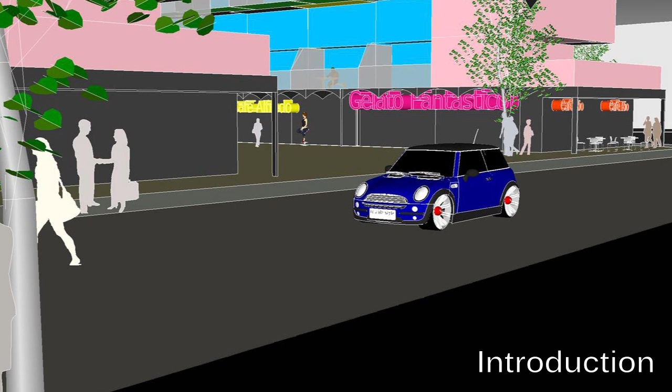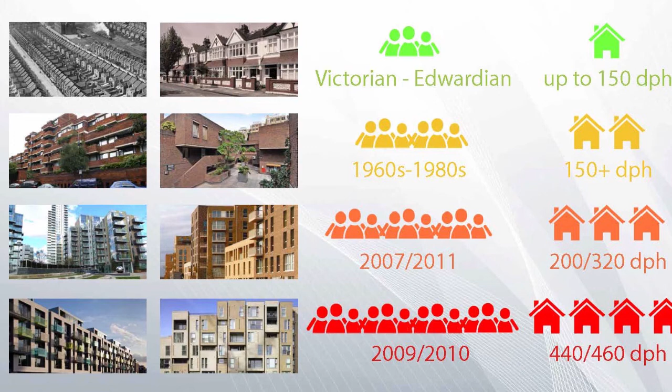The main focus of this project is to create high-quality development in the central area of London that can house 500 people per hectare. This project is a development of the Issues 1 Group project, which explores the consequences of intensified land use in two concepts: medium density of 200 people per hectare and high density of 500 people per hectare.

It also analyzed the benefits of superdensities, such as the possibility of providing rich social infrastructure, quality public transport links, and highly accessible public open spaces.

The group's two concept models were designed to deliver four key characteristics required to create a high-quality environment: functionality, sociable and sustainable, health and comfort, and identity.

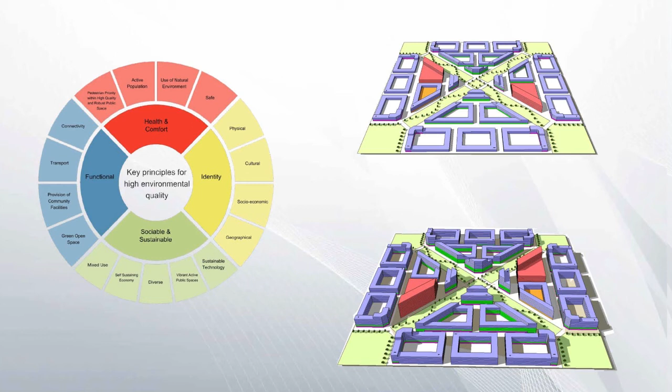As a consequence of providing land-hungry uses at high density, both concept models only offered flatted development as a solution. However, some believe that flatted development can be attractive to families that would otherwise prefer to live in a house, as long as it provides certain design solutions that make living in a flat similar to living in a house.

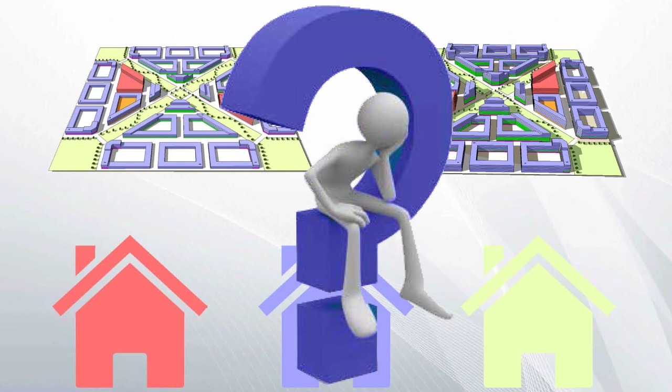This level of detail wasn't explored by the Issues 1 project, and therefore has been the main focus of the Issues 2 project. The Issues 2 project focuses on design of private outdoor space in a variety of forms, such as patios, roof gardens, and balconies.

Each space will have three qualities: privacy, natural light, and usability, that will make the space attractive and more usable. The previous Issues 2 report explored these qualities and offered design solutions which are now being implemented and tested in this final design-based project.

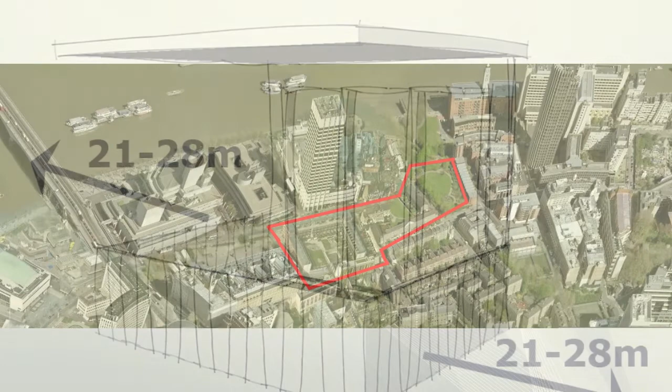The development site is approximately 1.85 hectares and lies within the South Bank area of London. The site lies in a sustainable location. It has good access to public transport hubs, providing local and international connections. Bus stops, tube and railway stations are also within walking distance.

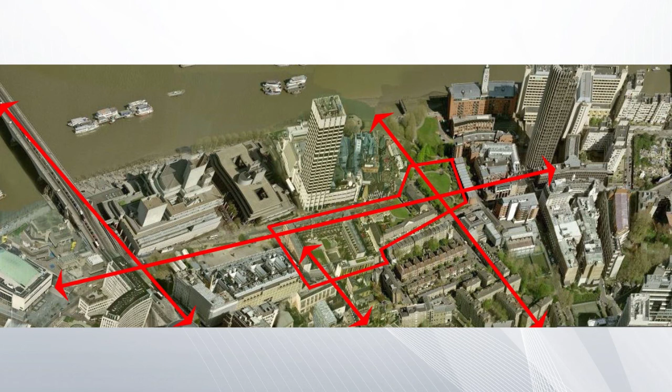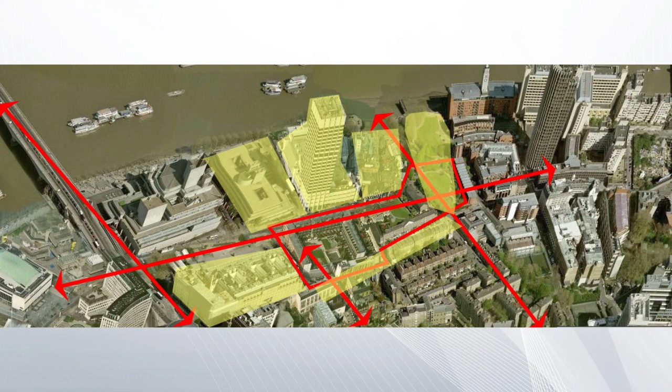Furthermore, there are cultural and leisure facilities close to the site, for example at Gabriel's Wharf to the north. The adjacent land uses include King's College London, IBM, London Television Centre, Gabriel's Wharf, Bernie Spain Gardens, and housing located opposite Stamford Street. Near to the site are the Oxo Tower and South Bank Tower.

The River Thames is to the north. The surrounding area is 3 stories and more in height. Coin Street is known for its characteristic microclimate and northeast winds. The area is generally flat. The development site is developed and is mainly in residential use, predominantly comprising flats.

The area has good legibility, being developed on a grid pattern, but suffers from lack of surveillance and inactive frontages. The site offers the opportunity to take advantage of nearby views, create active frontages, and enliven and connect the area with its surroundings by drawing people to the site.

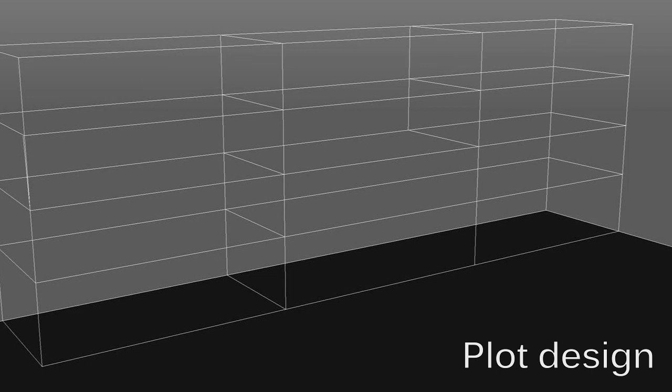Each plot has been designed within a modular template of the same floor space and height. This solution allows for mixing different flat types within a block and avoids the concentration of similar house types.

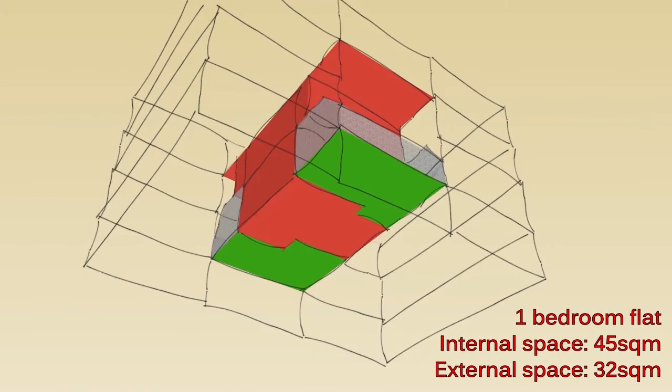In addition, building plots on a module allows for the individual private outdoor space to be fully enclosed and integrated within the living room area to facilitate flexible use of space. All flat types meet the nationally prescribed internal floor space standards.

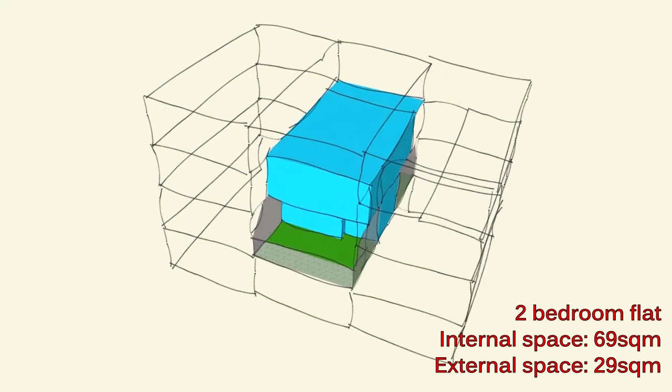As shown, the site consists of 9 plot types, including single-story studio apartments, 2-story flats, and 3-story houses. In accordance with the project brief, all plot types benefit from a private outdoor space which receives at least 3 hours of direct sunlight a day and can facilitate activities normally undertaken in a garden.

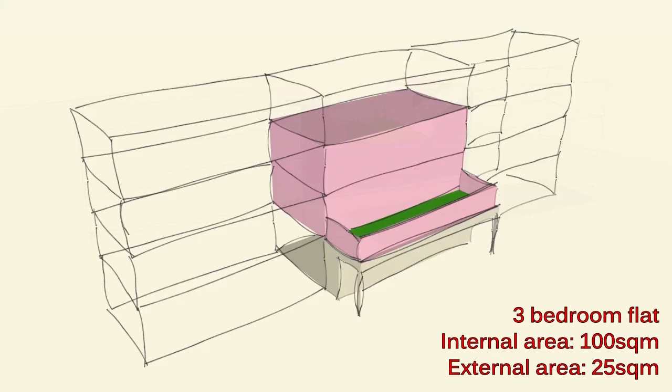As a standard, the areas that access the outdoor space accommodate living rooms and kitchens, and the areas below or above accommodate bedrooms. Houses also benefit from a work office space in a ground floor front room and a utility room at the rear. This solution deals with the lack of natural light within the ground floor area and activates the frontage.

Three-story terrace houses are located within the western parts of the site to complement the height of the existing housing to the south and the college building to the west.

To maintain privacy, each house has been designed to have at least 11 meters long garden so that the separation distance between rear windows meets the standard of 22 meters. In addition, a row of trees have been planted between the rear gardens to further screen direct views of houses.

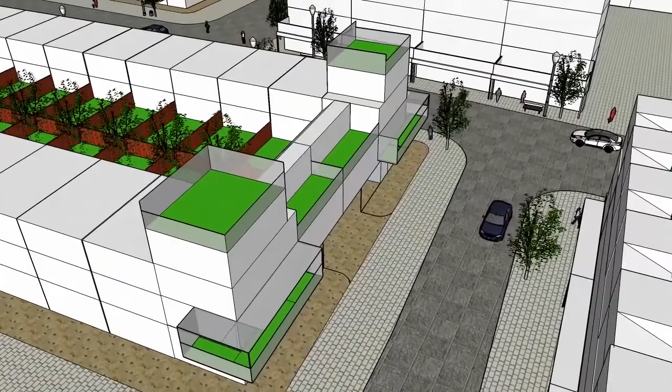At each end of the terrace are one-bedroom flats and studios with roof gardens and balconies overlooking the site and improving its surveillance.

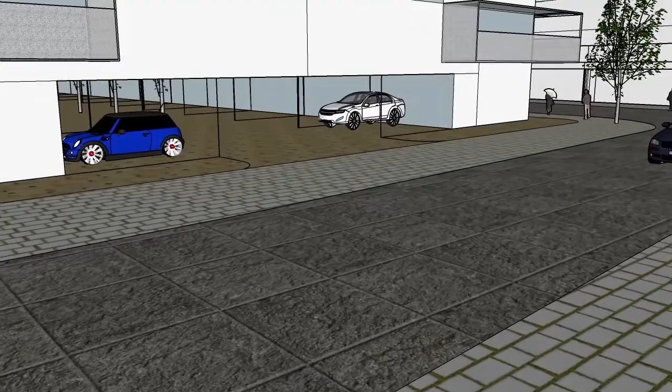Each house has 2 car parking spaces under the garden, which are accessible from the main street on both sides of the block.

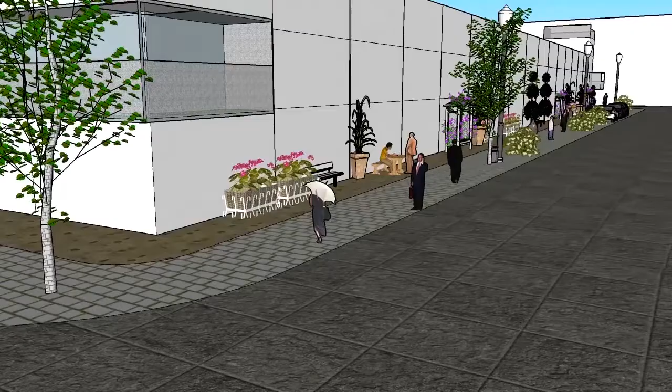The immediate area around the block has been designed as a semi-private hybrid zone that, although open, is owned and maintained by the residents, for example by keeping plants and creating sitting areas. This design facilitates social interaction, community spirit, and neighborly relations.

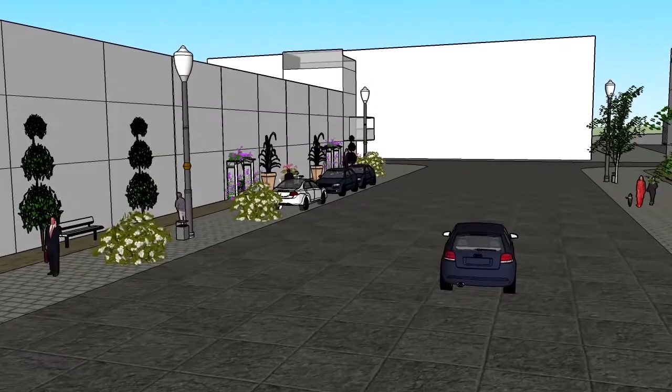In addition to this area, the public pavement is 4.5 meters wide and can accommodate car parking spaces, which are broken up by grouped street furniture and planting to soften its appearance.

There is a potential to extend the roof space of each house to create further bedrooms if necessary.

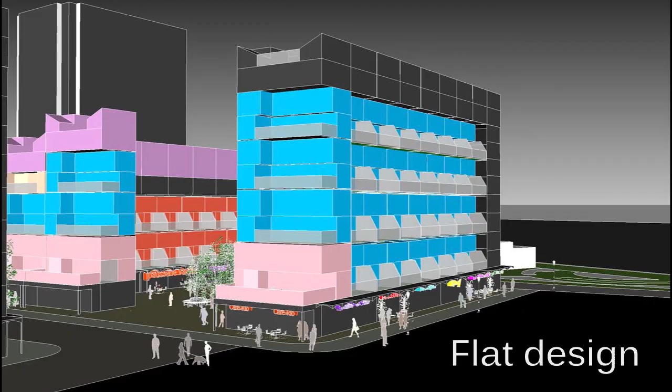Flats are located within the eastern parts of the site, with story heights increasing to the northeast. This solution creates a barrier to the prevailing winds, reducing the need for energy and improving surveillance of the open spaces to the east.

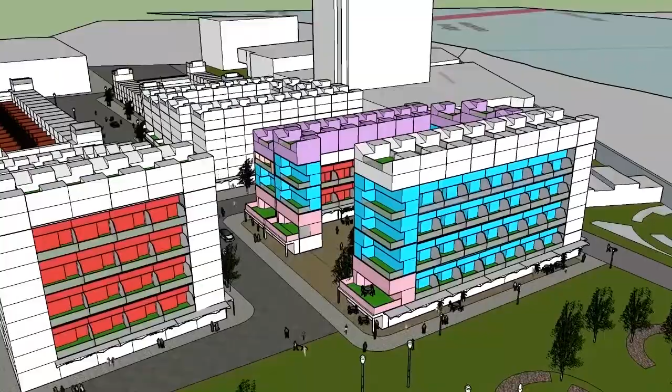The northeastern block has been used to test design principles due to its smallest and therefore most restrictive design. Despite this, the block incorporates all the flat designs shown in the previous section.

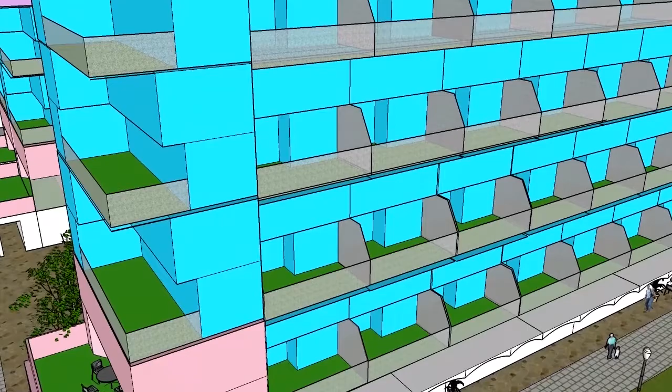The block also accommodates commercial units on the ground floor.

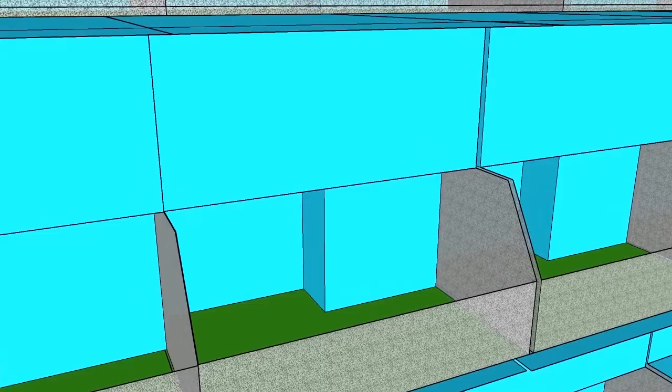Located to the east are double-aspect 2-bedroom flats. The double-aspect design has been developed to ensure that east and west-facing flats can offer sunlight throughout the day. The east-facing space benefits from sunlight in the morning and offers views towards the park.

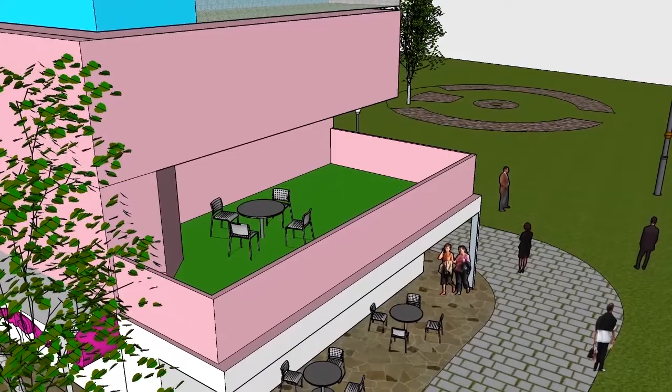Further flats incorporated within this block are single-aspect 2-bedroom flats and 3-bedroom flats with outdoor space located above the commercial units. As these flats are south-facing, they receive more than 3 hours of direct sunlight during the day.

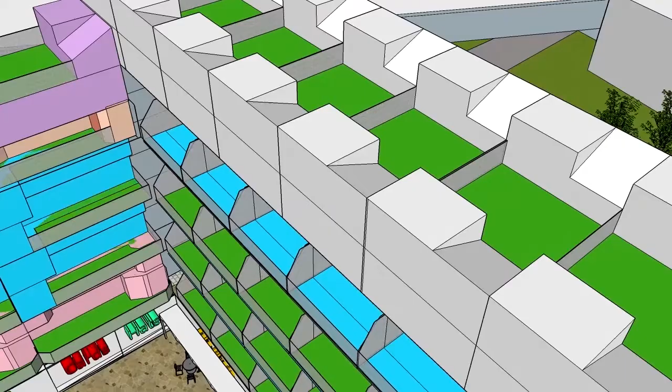Here we can see the other aspect of the 2-bedroom flats facing west, overlooking the internal courtyard area and benefiting from afternoon light. 3 and 4-bedroom flats are located on top of the block with roof gardens overlooking the park and internal courtyard and offering views of the River Thames.

The south-facing wing accommodates single-aspect studio apartments and 2- and 3-story flats with balconies overlooking the internal courtyard.

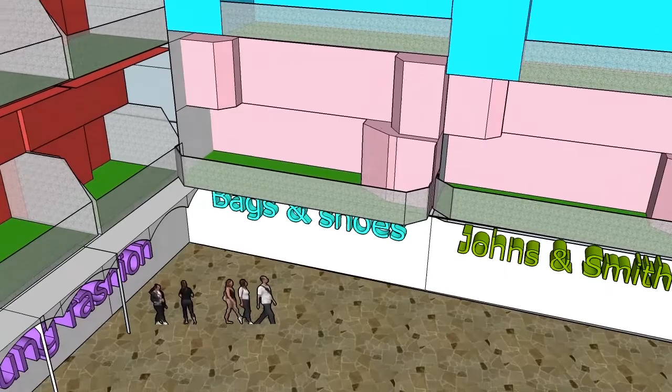The eastern wing accommodates double-aspect 1-bedroom flats and further 3- and 4-bedroom flats with roof gardens. The fronts of the south-facing flats overlook the main street within the site, improving safety and sense of security.

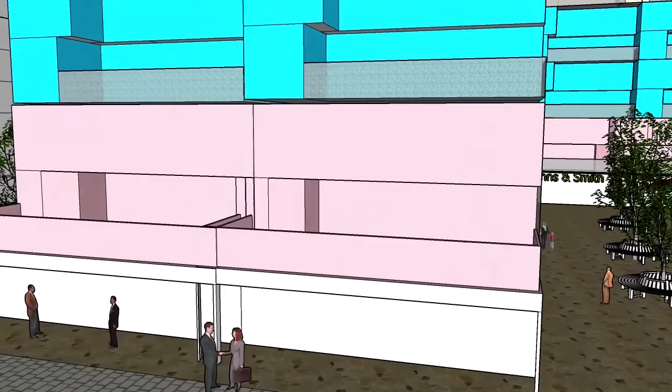To maintain privacy, the separation distance between the outdoor spaces facing each other is 30 meters. In accordance with the project brief, each of the outdoor private areas are usable, meaning that they can accommodate tables, chairs and plants and areas for children's play.

The outdoor spaces within this block and others, together with the local parks and open spaces, create a green corridor for wildlife and biodiversity, which also reduces the risk of flooding.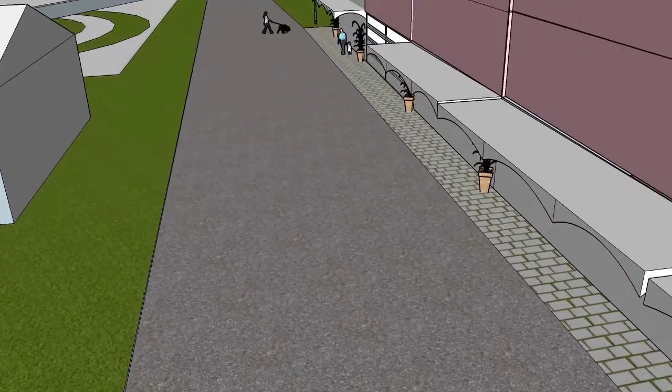In addition to on-street car parking spaces, there is undercroft car parking accessed from the main road via secured entrance. Each of the flats within this block has 1 allocated car parking space.

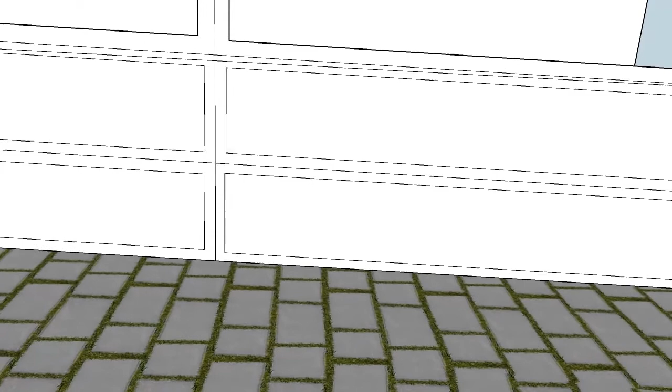The area within the block has been designed as a marketplace based on the Rotterdam Market building. During the day, the shops and cafes can be accessed both from outside and inside the block.

In the evening, only front accesses are available. This area encourages interaction with visitors and neighbors, contributing towards social inclusion and community strength.

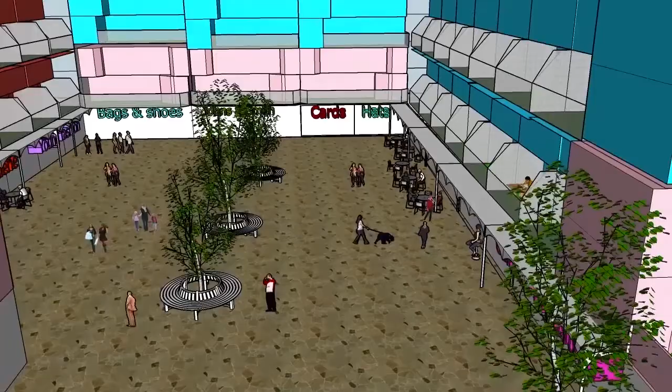The top of the block is screened, with a glazed roof to allow the use of the internal area during unpleasant weather conditions and allows sunlight to enter the courtyard and the private outdoor spaces.

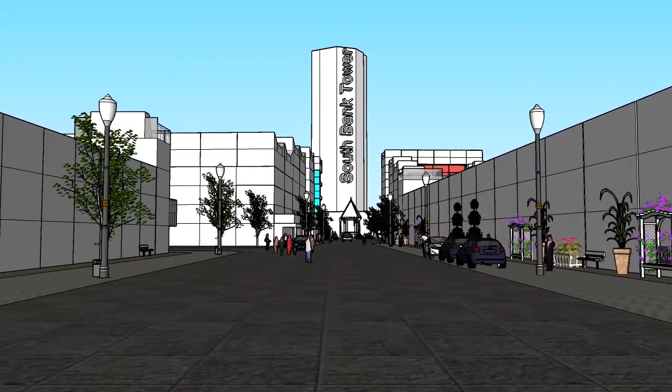The site has been designed on a grid pattern with a main route running west-east throughout the site towards the South Bank Tower located just outside of the site. This simple design ensures legibility and permeability of the site.

Areas immediately adjacent to the houses are designed as hybrid zones and can be used as front patios. They enhance the identity and distinctiveness of the area.

A variety of trees and planting is used throughout the site to soften the urban landscape, add seasonal interest, and boost sensory richness. The benefits of having trees include mitigating climate change, absorbing air pollutants, and improving air quality of the site.

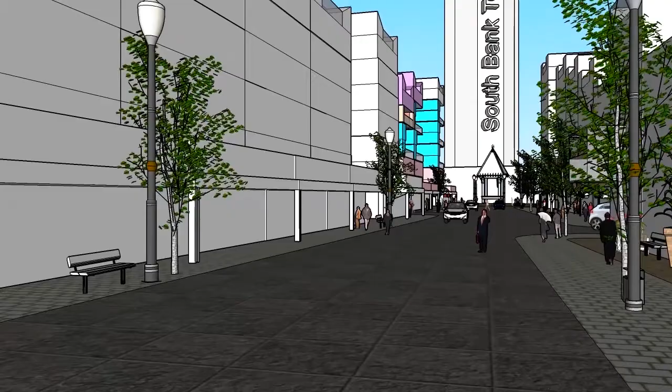All public areas are well overlooked, with the highest stories facing the public open space. Legibility of the site is maintained by the use of vistas, urban features, and street furniture. The existing towers located nearby add to the urban drama of the site.

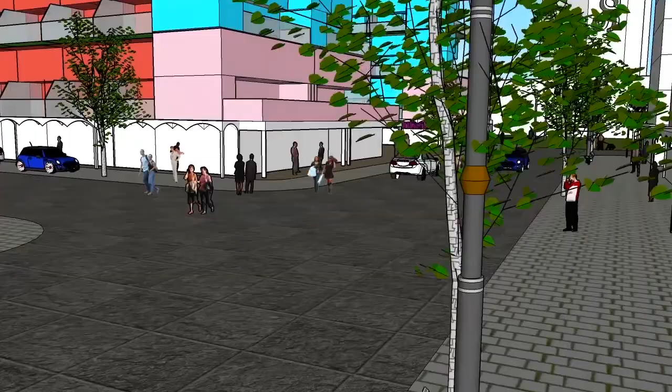The streets have been designed to act as public spaces and form shared urban spaces where pedestrians have priority. Car access from the blocks is direct onto the main roads to minimize car movement within the site itself. The appearance of surface car parking within the street is softened by greenery, background views, and vistas.

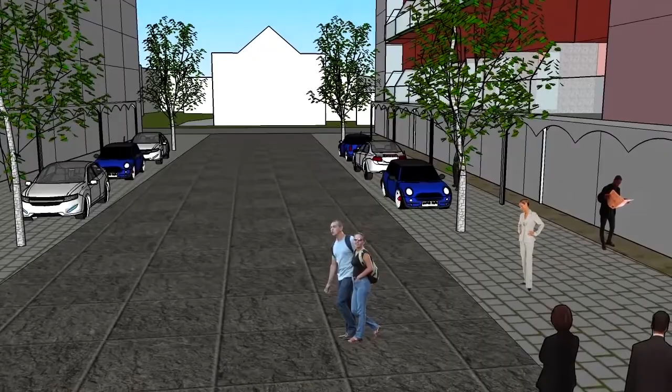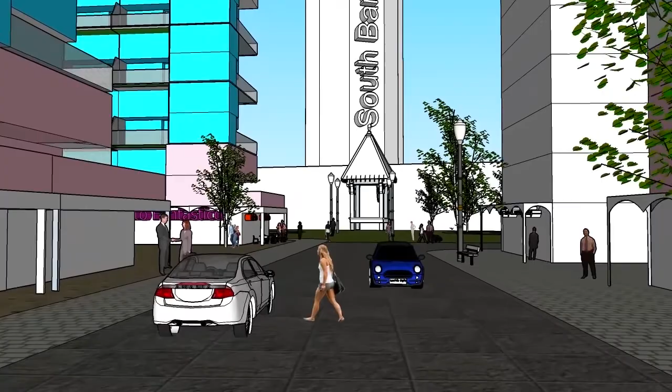All street surface materials are permeable to reduce the risk of flooding and consequent liabilities. There are also a variety of textures to improve the sensory richness of the site. The streets accommodate various forms of seating and grouped street furniture to add interest and offer a place to sit in the shade or sun.

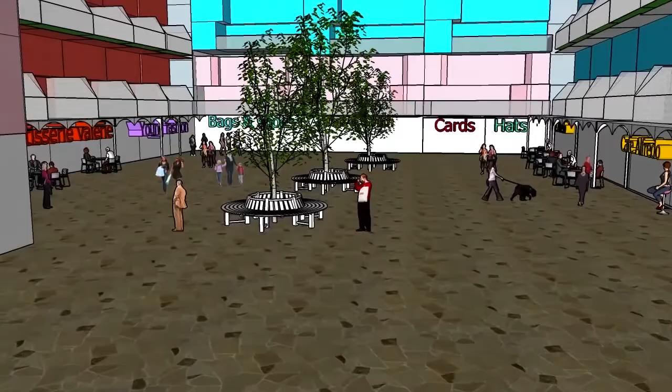The shop plinths further improve the appearance of the site by punctuating it and adding to the urban drama.

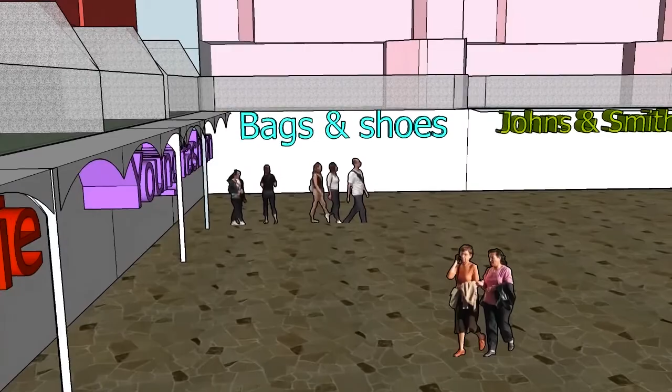As previously mentioned, the internal courtyard is used as a marketplace. It hosts shops, cafes, and restaurants. Such a mixture of uses attracts people to the site and encourages them to stay. Moreover, the smells projecting from the shops and cafes enhance the sensory richness of the site.

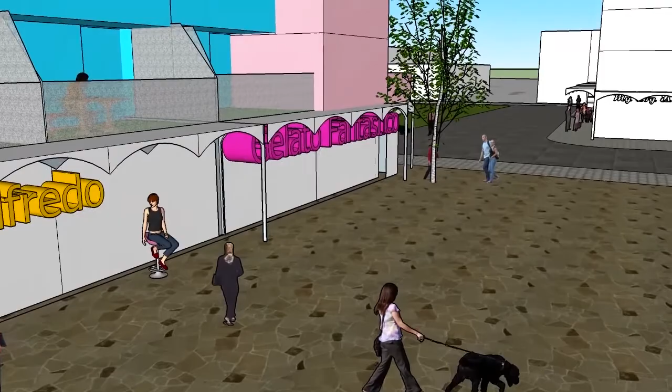This area also offers further public seating spaces and is directly overlooked by the flats above. As the courtyard is covered with a roof, it offers leisure opportunities throughout the entire year. The commercial deliveries utilize the external entrances only.

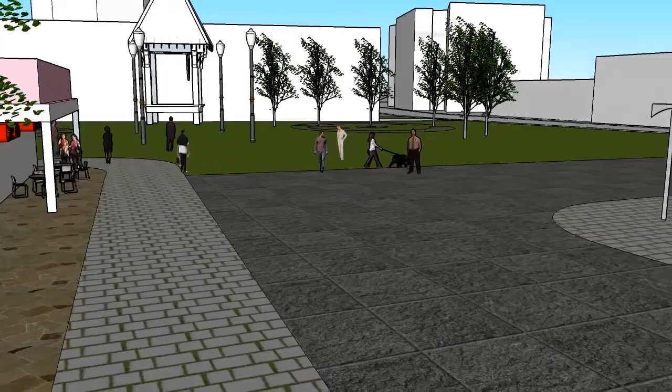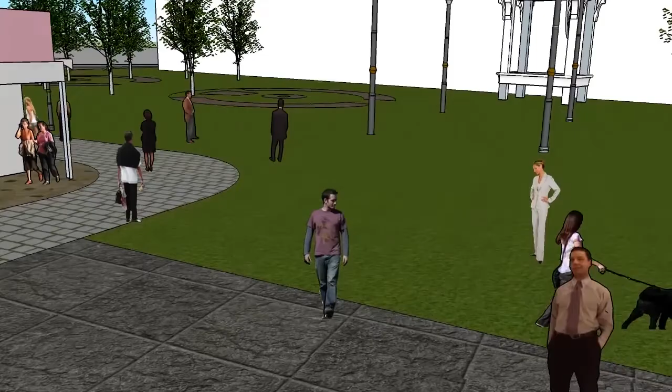In addition to the courtyard, the streets themselves are between 11 and 16 meters wide to be able to accommodate seasonal markets and festivals. The public open space is overlooked by the flats, cafes, and shops and can also host events.

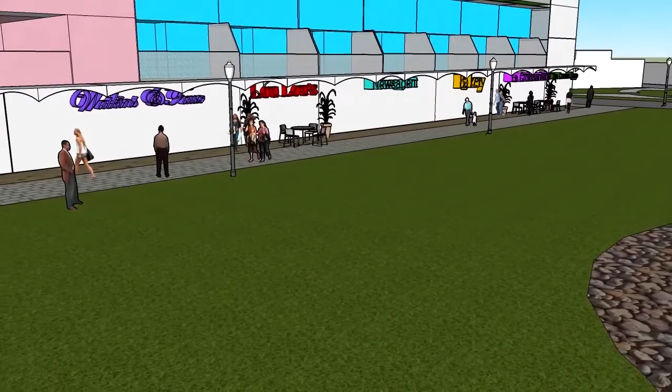Furthermore, it offers an opportunity to install an underground water storage tank to reduce the communal usage of water and mitigate flood risk.

The development delivers a mixture of over 300 units, including studios, 1 to 4 bedroom apartments, and 4 to 6 bedroom houses. Similar to the existing development at the site, the proposal is based on a grid layout that ensures good permeability. In addition, this layout ensures that each house and apartment has clearly defined front and back, with fronts overlooking public spaces and backs overlooking private spaces.

The Issues 2 Stage 2 project brief was to create a high-quality, high-density development proposal that houses 500 people per hectare and offers private outdoor space to each unit.

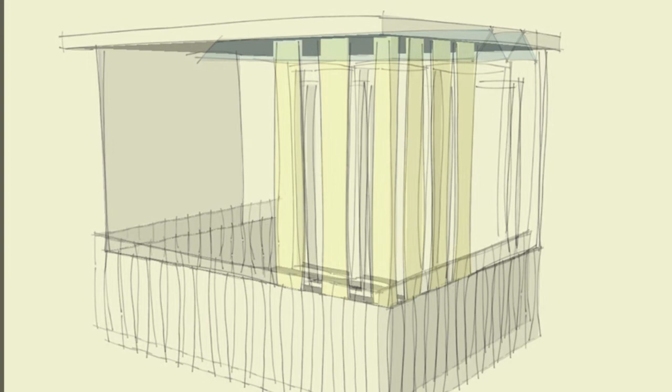The previous stage of this project focused on case studies and relevant literature in order to develop a set of design solutions required to deliver the project brief. These design solutions were presented and explained in the Issues 2 Stage 1 report.

This final stage project focused on testing and delivering these design solutions in the real context of Coin Street in London.

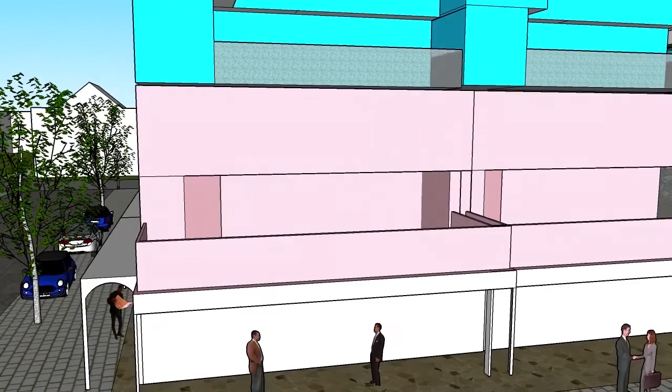The living environment in this proposal has been improved to make living in a flat similar to living in a house. This was achieved through the provision of a variety of private outdoor spaces, including balconies of varying design, roof gardens, and patio areas.

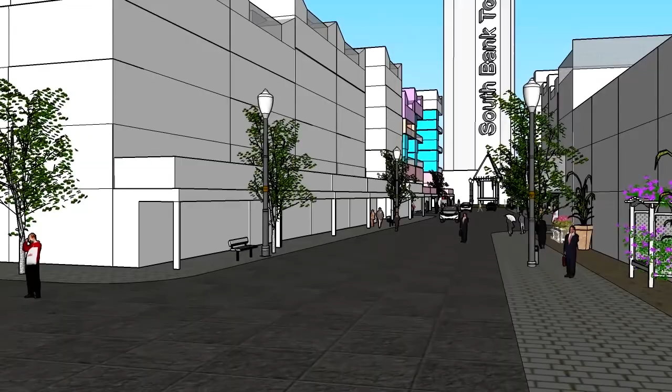The quality of public spaces has been achieved by smart design of shared surfaces with pedestrian priority, low traffic and grouped street furniture, vertical emphasis in building style to visually shorten walking distance, and attractive townscape punctuated by landmarks and views.

Surveillance of public spaces is achieved through the use of active frontages, balconies, large windows, and integrated on-street car parking.

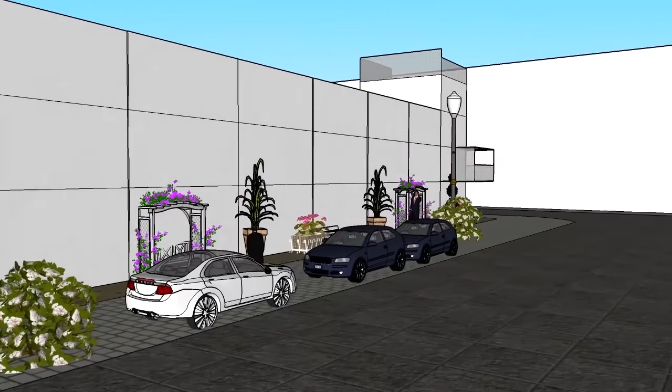However, there are still some areas left that could be researched and tested. For example, the detailed design of individual entrances to each flat, to meet the requirement of making flats similar to houses.

It would also be interesting to know what mixture of uses within the site would be appropriate to attract people to the site and make them stay, ensuring the site's viability and vitality throughout the day.